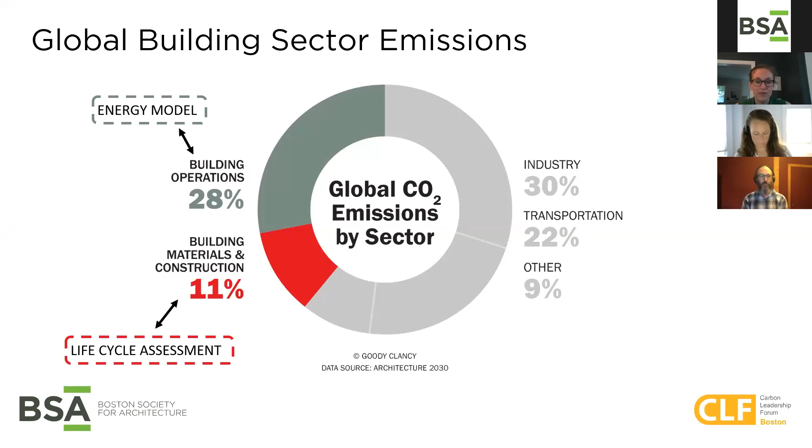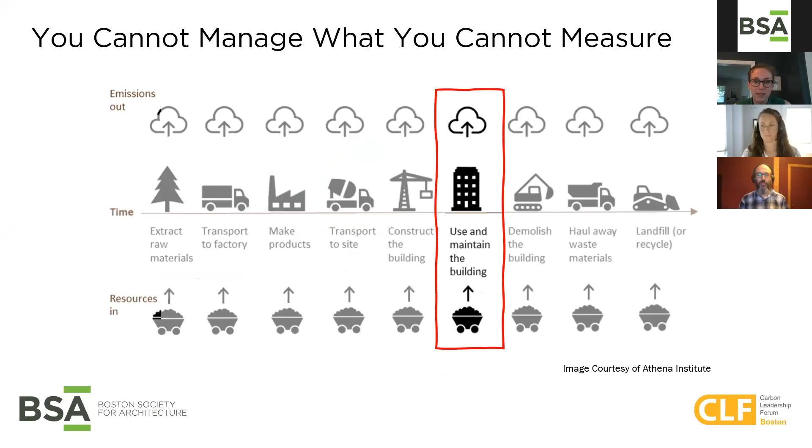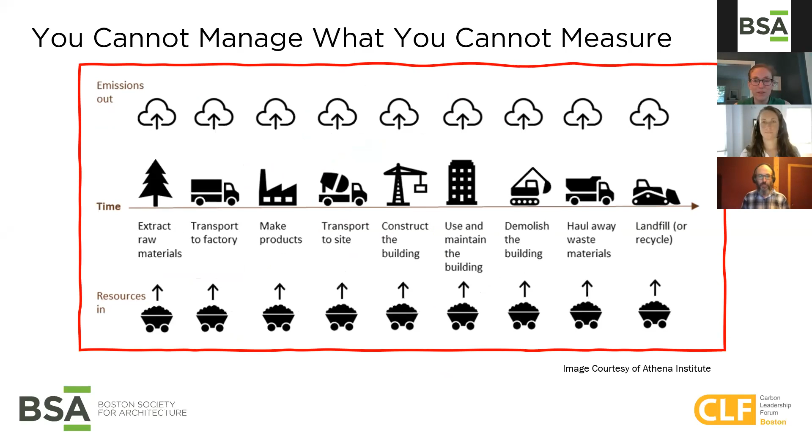I just want to reiterate that you can't manage what you can't measure, and I think we've heard this need to quantify throughout the series. Previously, when we're only talking about energy modeling and quantifying operational emissions, we're just focused on this one little narrow piece of a building's life cycle. But it's really important that as we work towards these carbon mitigation goals throughout the world, we're looking at the whole picture. We need to understand where carbon emissions are coming from throughout a building's entire life cycle and when those emissions are occurring.

But luckily, it's a fairly simple equation when you really get to the basics of life cycle assessment. You really just have to know how much of a material you have, and then you multiply that quantity times an impact multiplier, which the data is something we'll talk about, and then you get an environmental impact.

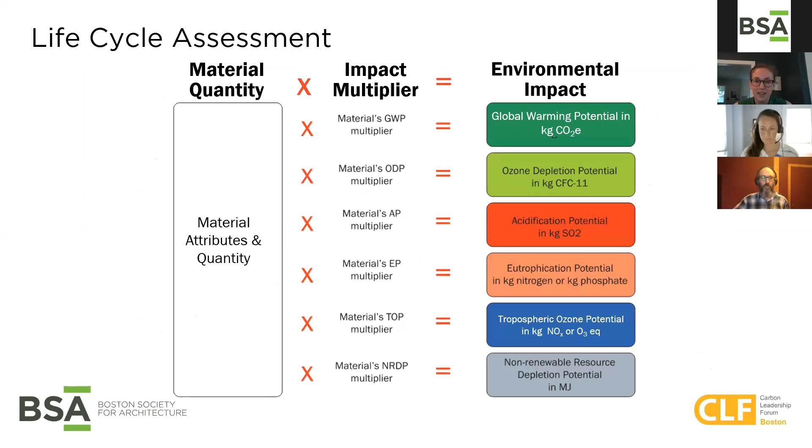These are just a sampling of questions that I came up with. There are obviously many more, which Maggie and Jacob will get into. So with that, I will turn it over to Maggie.

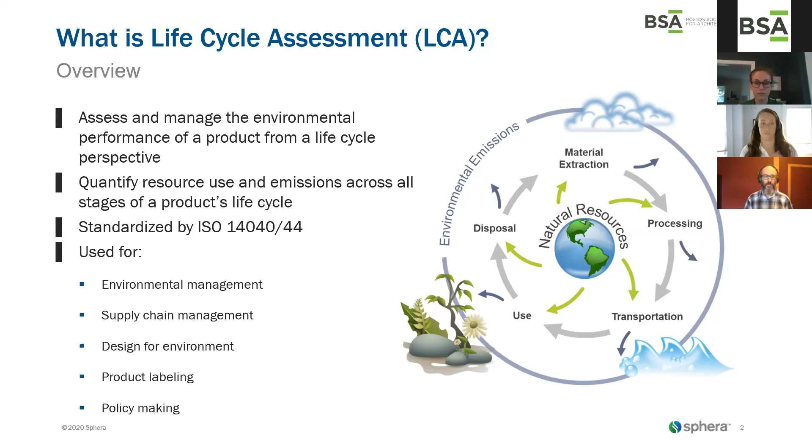So the ISO standard has four parts within the framework of conducting an LCA. The important thing in this image is the double-ended arrows - it's an iterative process. You may discover things as you're doing an LCA that require you to refine your goal and scope, to look for data elsewhere. You may want to include or exclude something later on, depending on the uncertainty associated with it. So there's always the opportunity to go back and refine.

So the first step in doing any LCA is to define the goal. Why are you conducting the LCA? What do you hope to get out of it? That'll inform how you set your system boundaries. Then you determine the scope, so what is included, what isn't included, details like the functional unit, where you're going to get data from, what impact assessment categories you're going to look at, etc.

Once you define that, then you're going to do the data collection, and this is looking at just the primary data. So if you're an insulation manufacturer, you're going to look at all the inputs and outputs associated with your facility. Then the modeling process combines that with background data, and that is life cycle inventory data, existing EPDs, etc., that you combine to create a complete inventory.

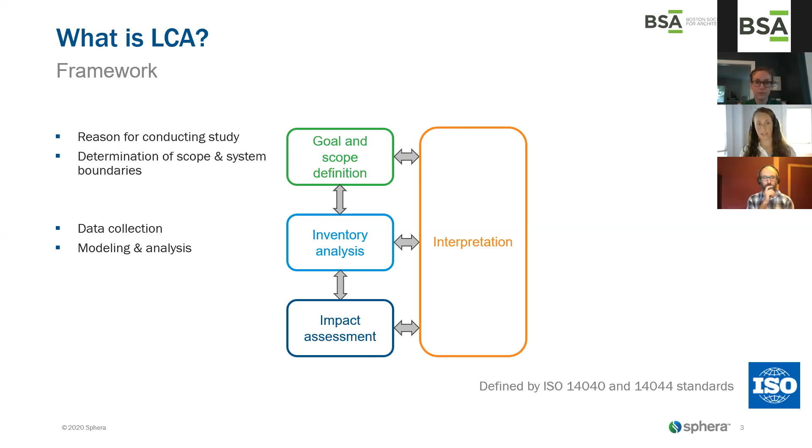That inventory gets looked at through the lens of impact assessment. So inventory is the amount of carbon dioxide, the amount of methane, and impact is global warming potential. So those each have their own contribution to overall global warming potential.

And then you have to interpret it. You have to understand where did you make assumptions along the way? Are your results sensitive to those assumptions? Do you need to consider the uncertainty around your results, because the amount of electricity used during the use phase of the product could be plus or minus 30%. So you need to consider how that affects the overall results.

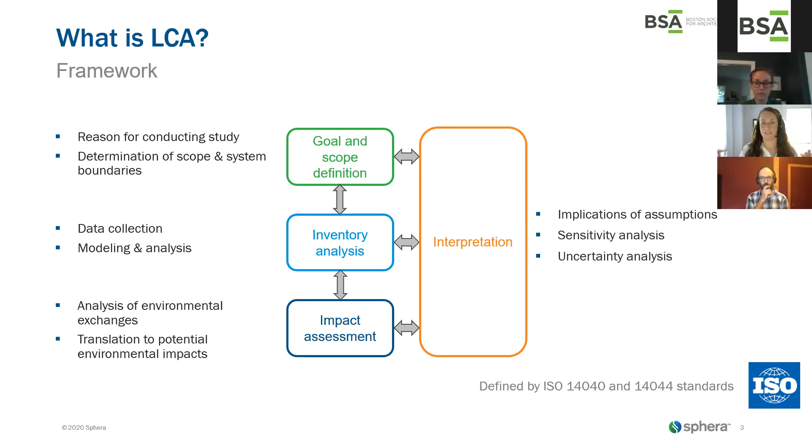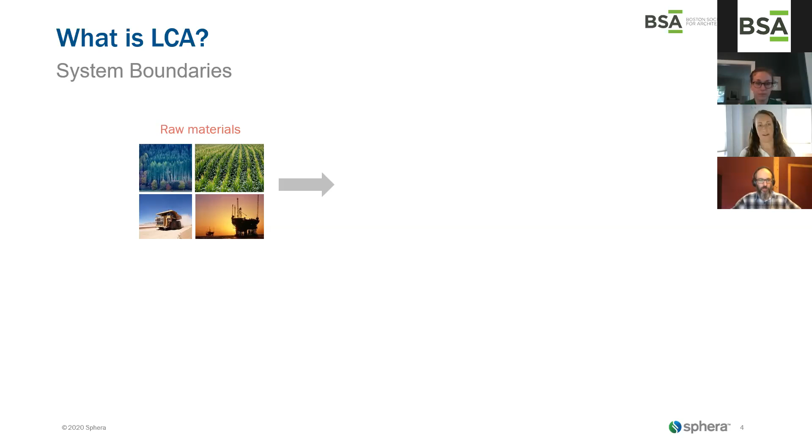So when we talk about system boundaries, you've probably heard the term cradle to grave, cradle to gate. This is what we're talking about. So you start with raw materials. That's anything coming from the ground. That's crude oil, wood, water, etc.

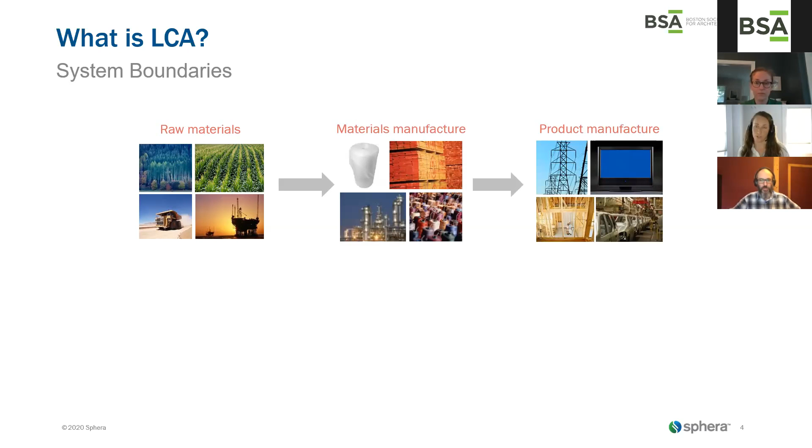There's materials manufacturing. So you've extracted ore from the ground that gets processed to zinc. And then you use that in your product manufacture, so that's creating the final product before it goes to the consumer. That's what we call cradle to gate. That is the system boundary that's really in the control of the manufacturer. They can kind of choose roughly what materials they use and where those come from, as well as everything that's going on at the actual facility.

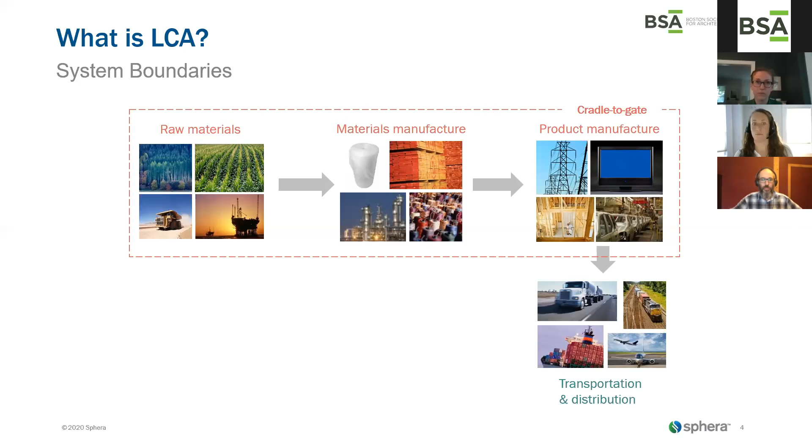Once you add in after the facility, so transportation and distribution, which you could argue is somewhat under the control of the manufacturer, but depends on who's purchasing the product. The use phase, recycling, so does any of the product get recovered and then could somehow offset any of the inputs to materials manufacturing? And then final disposal, so landfilling or incineration. Once you add all these categories in, we've got cradle to grave.

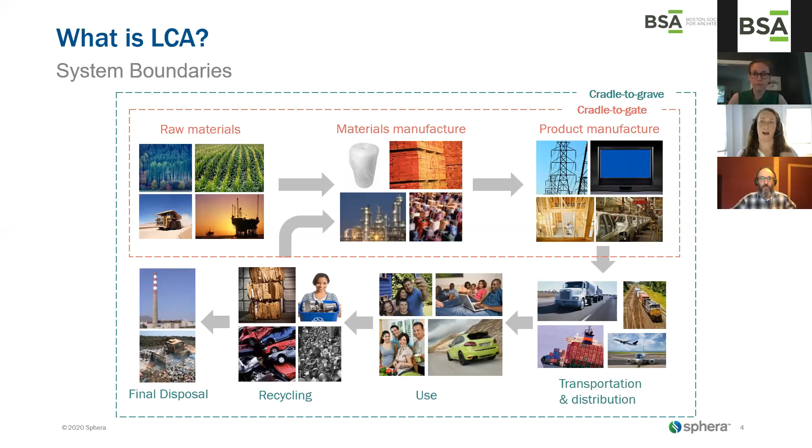Another way to think about it is the modules that you'll see in environmental product declarations. So pretty commonly you'll hear the term A1 to A3, which is the production stage. That's basically cradle to gate, the bare minimum required in any EPD. Construction stage is A4 and A5, so that includes transport to the installation site, and then any burden associated with installation.

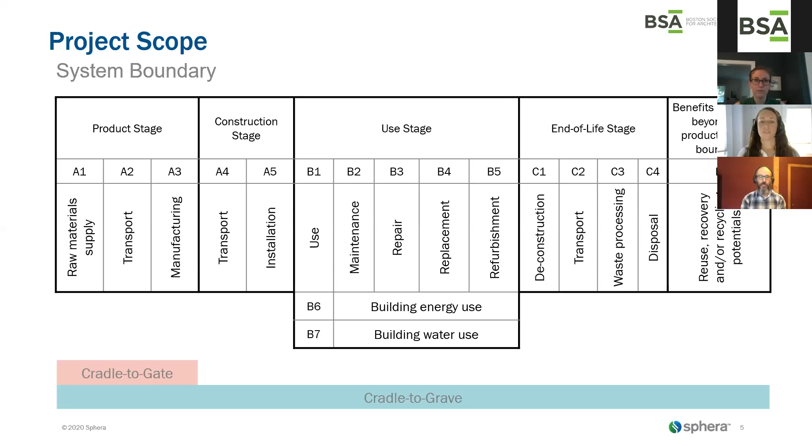Use stage is the B modules, end of life stage is the C modules, and module D is any recovery outside the system boundaries. So you don't necessarily know that in 60 years the steel in your building will be recycled. It probably will, but we want to account for that. Once you add in all the modules, then you've got a cradle to grave system boundary.

So I've said life cycle inventory a couple times. There's also, and I realize maybe I haven't defined that, two terms: life cycle inventory and life cycle impact assessment. Life cycle inventory refers to kind of two areas. It's the amount of materials or energy required to make your product, so in this case the amount of electricity, fuel oil, the emissions associated with it.

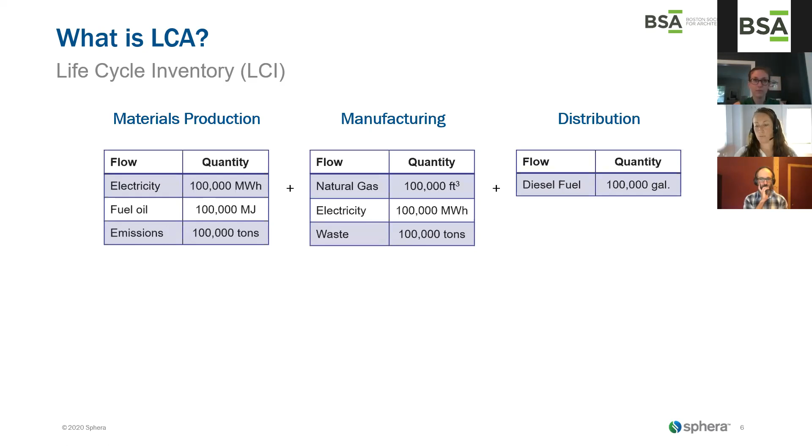So this is like upstream materials production. There's also that same information available for your manufacturing and the amount of fuel to distribute the product. So this is your life cycle inventory process. You might also hear of it as a unit process, so it's all the inputs and outputs associated with making a kilogram of a product.

When you combine that with background data, so existing life cycle inventory data, the amount of emissions or resources required to produce a kilowatt hour of electricity, that is when you get the full life cycle inventory, which is the list of resources - crude oil, hard coal, groundwater coming out of the ground before man has touched it in any way, or woman - and emissions to the environment, so air, water, land, etc., after humanity has released it back into the environment or the watershed or what have you.

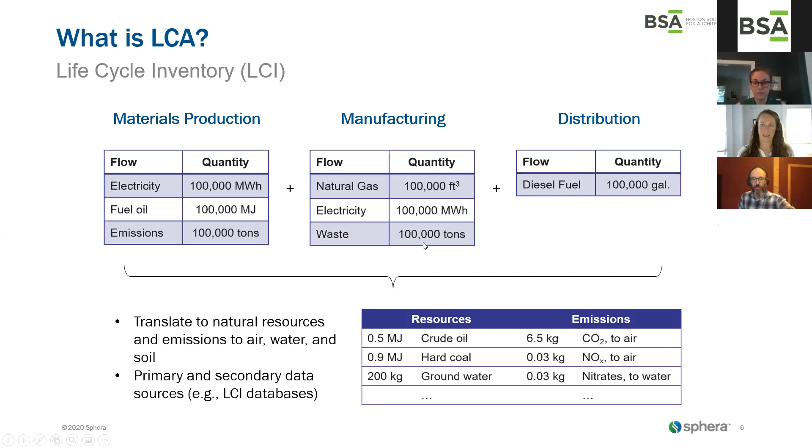So you end up with this long list of emissions that I don't know if a kilogram of CO2 compared to a kilogram of NOx is good, bad, medium, can they even be compared? So what we do is we translate to a life cycle impact assessment.

Different emissions to air, water, or land have different abilities to affect the environment in some way. So methane and carbon dioxide have the ability to increase radiative forcing associated with greenhouse gas effect. We then assign equivalencies, so the kilograms of CO2 equivalent, to basically be able to talk about methane and carbon dioxide in the same units.

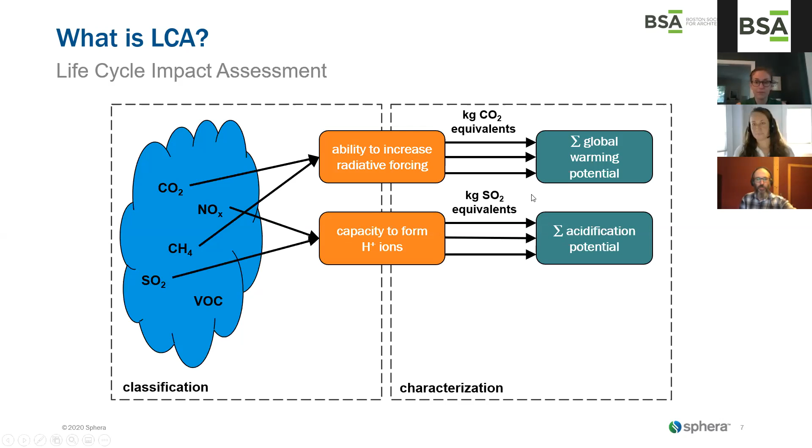And this is also done for acidification potential. So NOx and SOx have the ability to form H+ ions, making the air more acidic and therefore rain more acidic. And then NOx and VOCs have the ability to form tropospheric ozone, which is summer smog potential. So these are your life cycle inventory here on the left, and on the right you have your life cycle impact assessments, and that is done so that we can come up with common metrics to discuss environmental impacts.

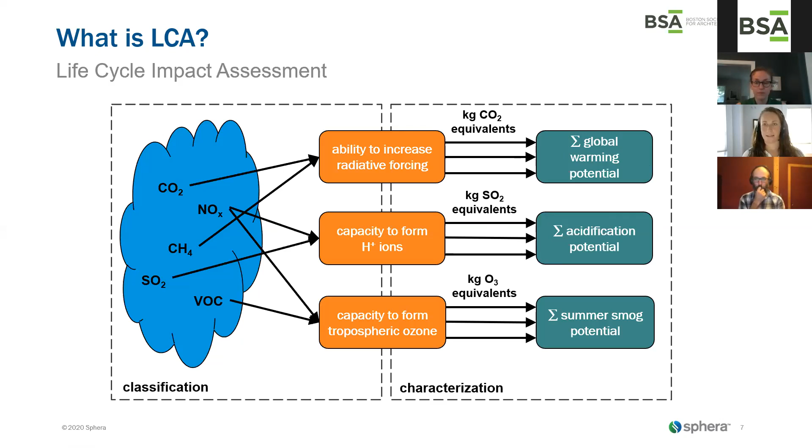So just another example: we have the inventory value, the amount of methane, the amount of carbon dioxide, and then we have the characterization factor. Lori talked about this in her slides at the very beginning. Methane clearly has a lot higher impact on the environment, so in this case, even though we have way more CO2, the impact of the methane is actually higher on the global warming potential.

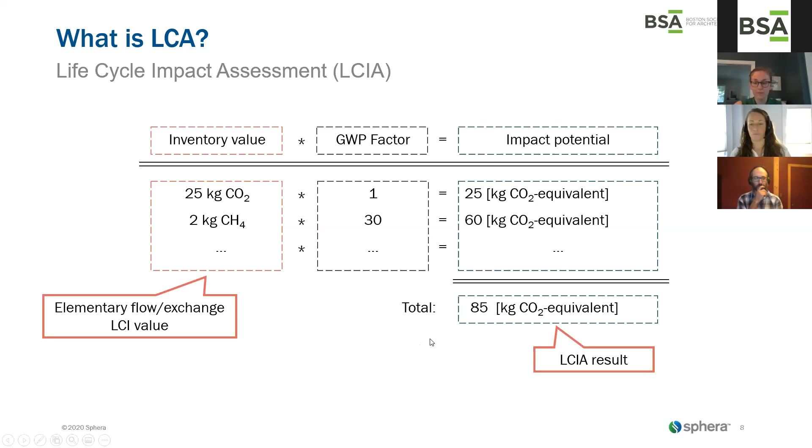So this is how we calculate the life cycle impacts. There's a number of life cycle impacts. I know we're talking about carbon here, but it's important to remember that for every decrease or increase in carbon, there are trade-offs in other environmental indicators. Obviously you can't expect everybody to be able to weigh all these different impact categories themselves without a lot of experience, so I think it's great that we're starting with carbon, but it's important to remember there's other things besides carbon.

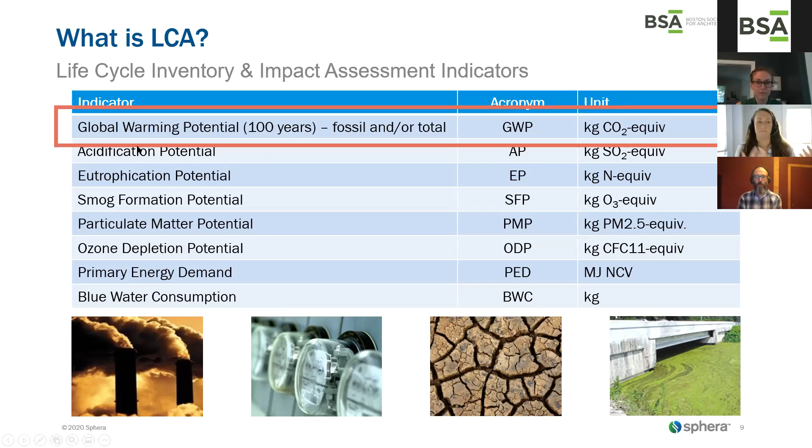Examples include acid rain, smog, ozone depletion, particulate formation, etc. So you can go into this on your own — I'm not going to get into too much detail.

The other tricky part about LCA is interpretation — how do you use the results, what do they mean? What we have here is a basic contribution analysis. You'll notice we're not focusing on the number, we're focusing on what is driving it, what is bigger, how do we get that lower, where are opportunities as a manufacturer to reduce my impacts.

So this is one way that LCA is so great, because it's really used for optimization. It tells me where's the low-hanging fruit, where do I focus on in reducing my impacts. Alternatively, I may have no control over the active use, so while I acknowledge it has a big contribution, I can't change that, so let me focus in on manufacturing.

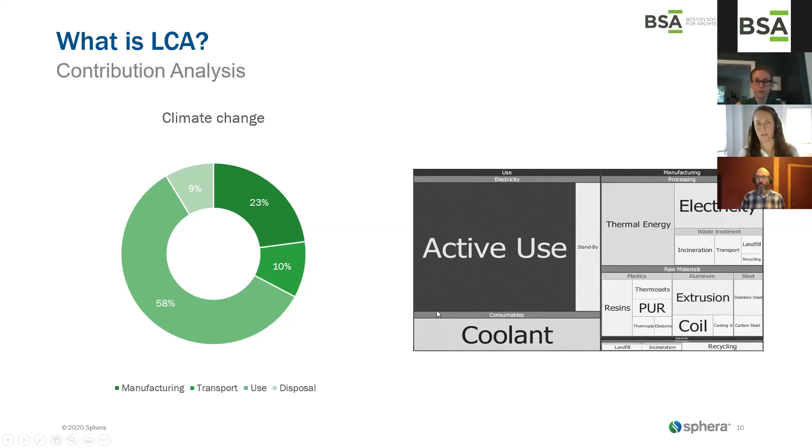I do want to do a couple disclaimers. One thing with LCA is its potential environmental impacts — we always say global warming potential, acidification potential. We have no ability to predict absolutely that a kilogram of CO2 released now is going to actually have this global warming effect.

Also, there's inherent uncertainty in LCA. You're combining data — your manufacturer is trying to represent production for 2020, but you're creating an LCA with background data that's actually from probably 2015 through 2018. And then you're going to use that in your EPD, which is valid for the next 5 years. So if you think about that, there's a huge temporal uncertainty associated with it. It's probably not going to change dramatically, but it's important to note that there is that difference.

You're also using average geographical data — I have an average data set for electricity produced in the US, or average mining of some metal, but you're getting it from this specific location. In fact, it's not going to give you the precise results, but it'll give you accurate results. So I just wanted to put that disclaimer. It's not that you shouldn't use LCA — the results are still valuable, but to three significant digits it's maybe not that helpful; order of magnitude is really where you should focus.

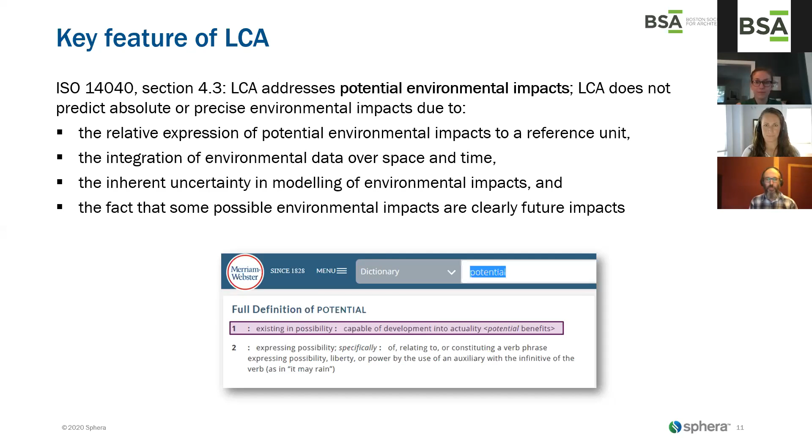We love using this picture. It's never going to be perfect — we know that — but it's going to get you somewhere, and it's going to get you to understanding if something is roughly better, roughly worse, roughly the same, and also where you can improve.

I also wanted to touch briefly on biogenic carbon in LCA. The Carbon Leadership Forum did a great large session on just carbon and wood, so you could spend weeks talking about this. I don't want to get into too much detail, but basically people have this initial thought: okay, it's renewable, it's wood, it's absorbing carbon, therefore it's carbon neutral or carbon negative.

But in fact, during processing, manufacturing, maybe even use and disposal, that CO2 may be re-released. So we have CO2 absorbed when the product is growing, but then you could burn wood for fuel in processing, and you release carbon dioxide. You may also incinerate it at end of life, and then you release that carbon. So it's not necessarily neutral or negative — it just depends on what happens over the life cycle.

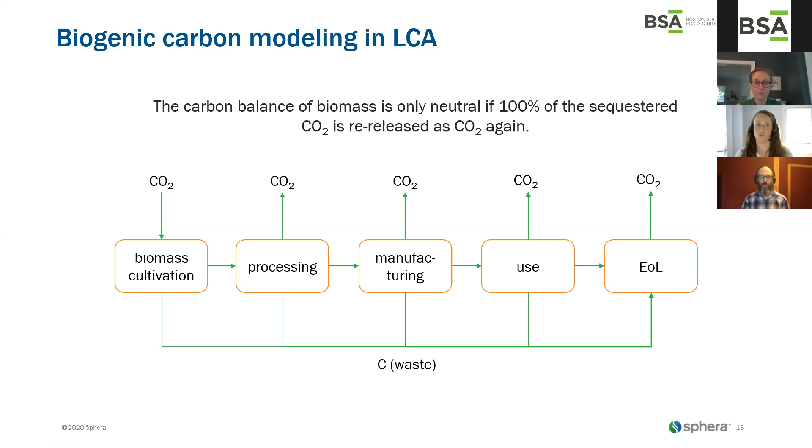So it's really important to account for that when you're modeling. The other thing to note is that if any of the CO2 or carbon is converted to methane, that's actually going to have a higher impact than what was withdrawn from the atmosphere when it was growing. So it could actually end up not being carbon negative or carbon neutral. If you really want to dig into this, I put the link for the Carbon Leadership Forum's Wood Carbon seminars — you can get into a lot of detail, but I just wanted to touch on that briefly.

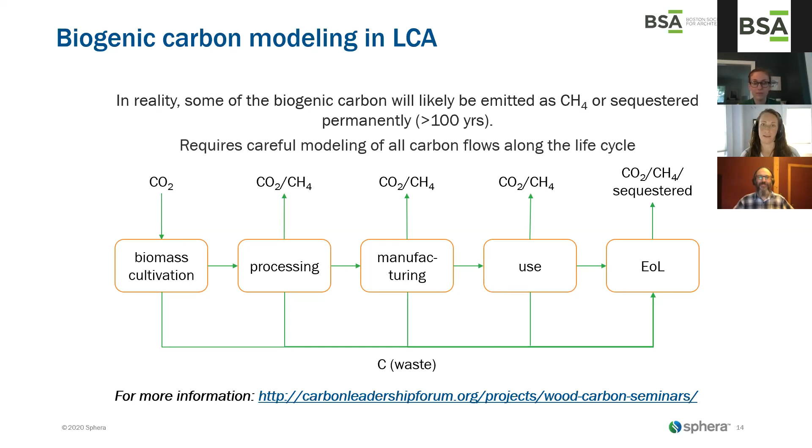Another thing to note is that your EPD, your LCA data, is only going to be as good as the data underlying it. So we have two areas of data, primary data and secondary data. Primary data is your bills of materials, details on technology, recycled content, etc., where it's coming from. That's coming from the manufacturer, and so they need to provide complete data. Part of that is on LCA practitioners like us at Sphera, who have to make sure they've provided complete data.

The secondary data is background data: the energy, the impacts associated with producing a kilowatt hour of electricity, environmental product declarations, literature. These are the sources of data that go into another LCA. And the goal is to have those come from reputable sources.

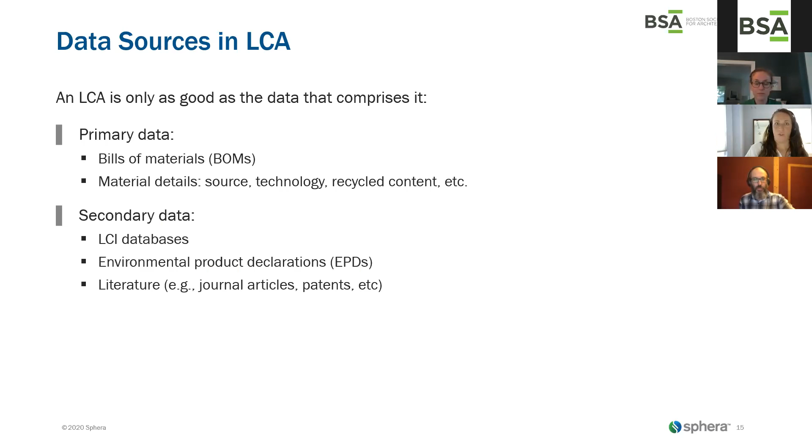Anybody could publish an LCA on their website, and it may not be complete or of high quality. ISO specifies details on data quality, and you need to discuss those in your report.

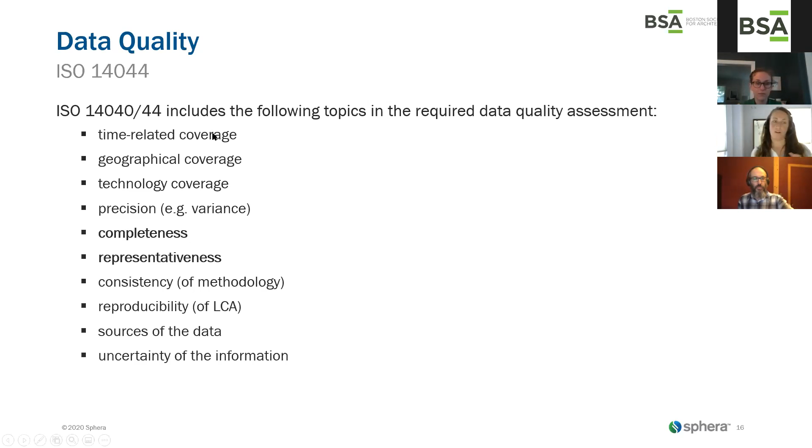A few things I really want to dig into are completeness and representativeness. When you're considering representativeness, you're modeling for a specific location, a specific technology, at a specific time. So you want to get as close as possible to that, but you're never going to hit it right on.

So it's important to be as representative as possible, but know that you're never going to be precise. And completeness means making sure you're using a reputable source for your background data, as well as for conducting the LCA, because a lot of completeness comes from just experience doing LCAs.

You may also want to dig into the available documentation. What are the assumptions behind the LCA? What year is the data from? Did they exclude anything that might actually be important? Stuff like that.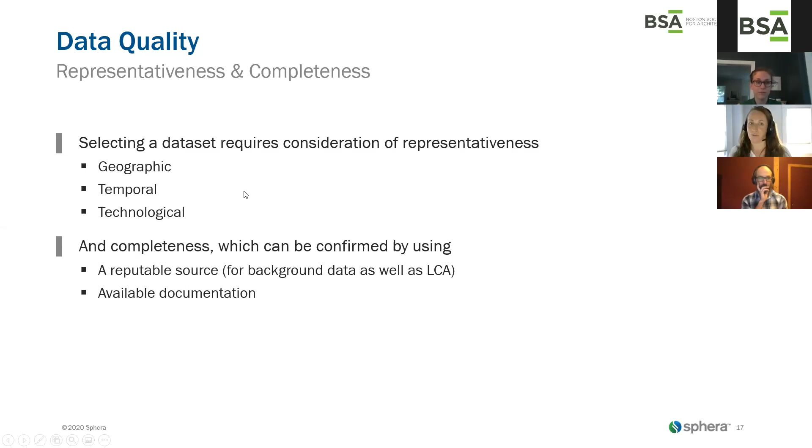This matters when you're talking about data quality, especially when trying to choose an appropriate data set. So for anybody using Tally, you've got an average data set and a company-specific data set or EPD. How do you choose?

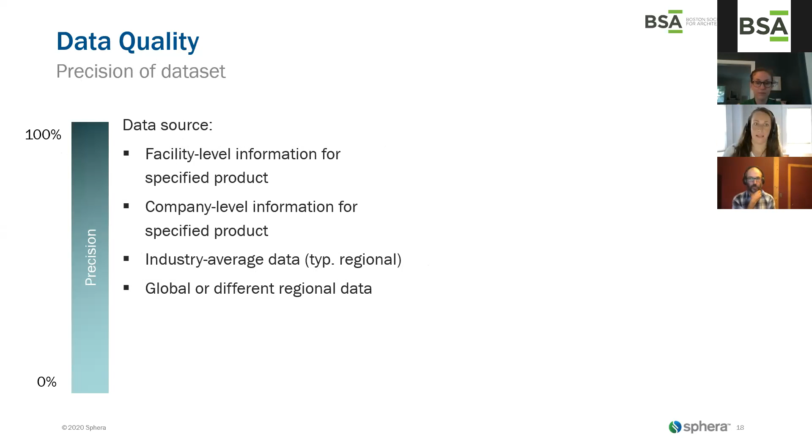I want to emphasize that in LCA in general, we're really looking for high accuracy but low precision. We understand that you're never going to be precise for the reasons I've already mentioned. So trying to get order of magnitude is the real goal.

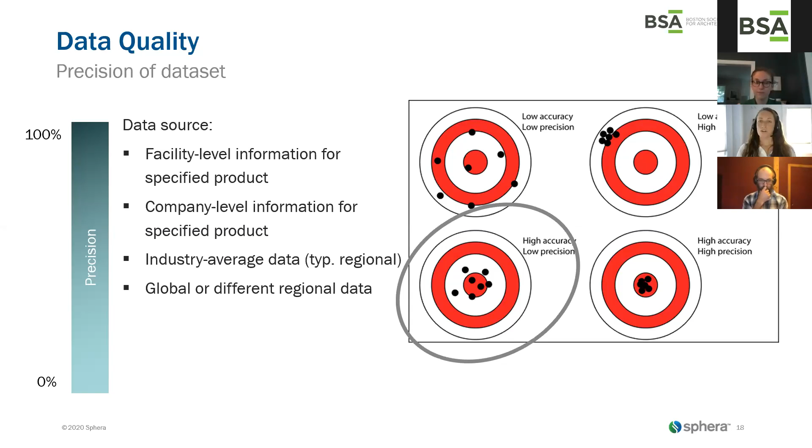You may be fine just choosing an industry average data set because it's going to help you make that initial decision—do I use material A or material B? As you improve the selection of materials and know what company you're getting it from, then you can increase your precision.

For example, I just pulled these from the internet, publicly available EPDs. If you were making a decision between mineral wool and fiberglass, it doesn't really matter which one you choose between industry average, which is the NAIMA, and the company specific, which is Owens Corning or Certainteed. You're still going to get a pretty clear answer which one is better for your project.

LCA and carbon footprint are only one of many metrics you'd use to make a decision between materials. So it's not necessarily the only one, but if you've decided as a specifier or designer that the most important factor is global warming potential, then you might look at this and say, well, we want to go with fiberglass.

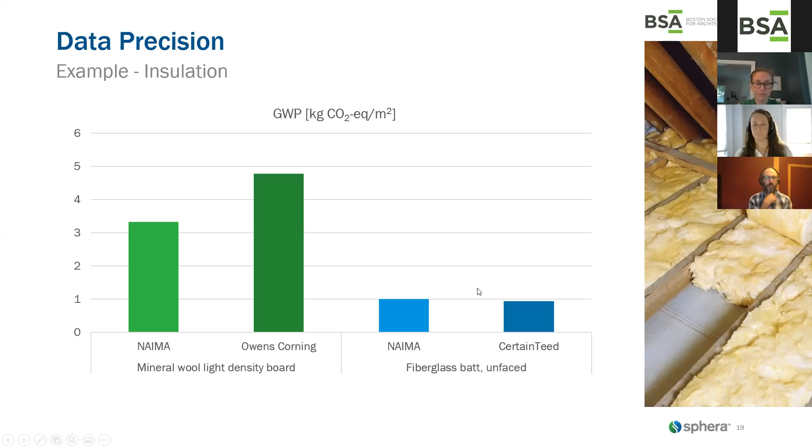I know there's a lot of caution against comparing LCA results and EPDs, but ultimately that's what EPDs are created for—to give consumers an idea of the environmental impacts and how to make a decision between product A and product B.

So while I do advise caution whenever comparing results, if you are, please make sure that, if it's an EPD, the product category rules are the same. That ensures that any underlying methodological decisions probably will align.

You certainly need to make sure the functional unit is the same. Is it 1 meter squared of product at an R value of 1, or 1 meter squared at an R value of 10 or something? That's obviously going to make a difference.

System boundary—have they included or excluded the same things? And in those things included or excluded, could that actually have a big impact? Reference service life—are the products actually equivalent, functionally equivalent? Can you use them for the same amount of time in a building? If not, if you have to replace one product twice, you should take that into account.

Reference year of the primary data—ideally they would have the same reference year or as close to it as possible. Background data ideally would be the same, and the reference years would be pretty close.

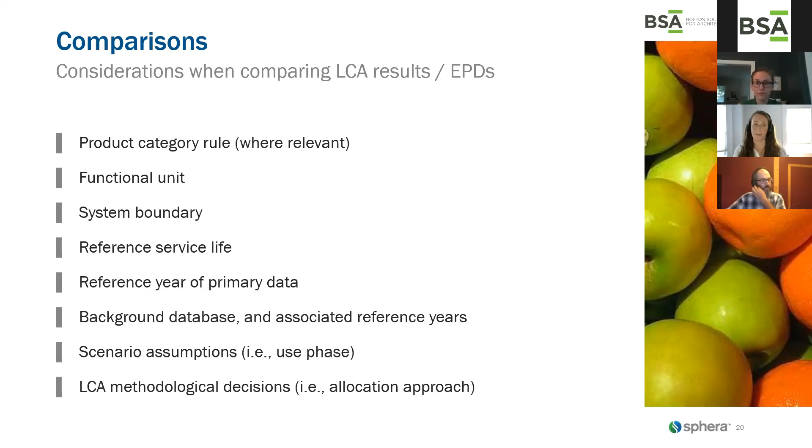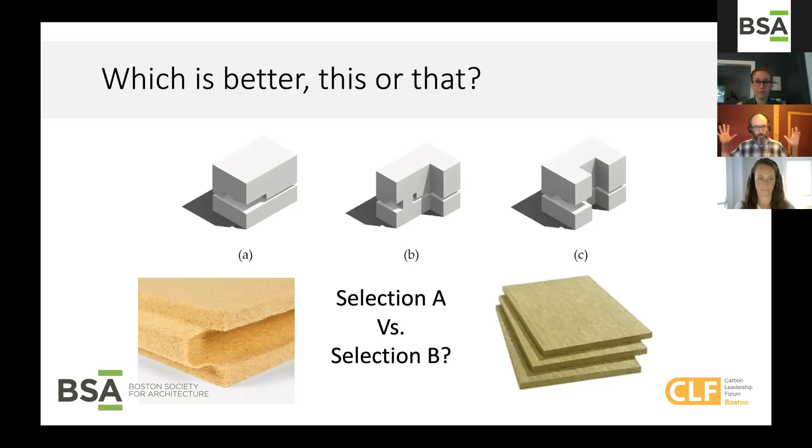That same question of this versus that may show up on a very detailed material basis. That's where it's asking, is this wood fiber board or this mineral board going to be better from a carbon standpoint, or by what magnitude? So that direct comparison, whether it's big picture or micro, is one batch of questions you might be asking.

Another would be, how much better is this, and then compared to what? And that introduces a concept of baselining. If your goal is to improve your design, compared to what is that baseline? That could be my massing scheme compared to a baseline of your generic clip art building, or my sexy new carbon storing building insulation product compared to the average practice of, say, a foam board product. So how you establish that baseline, what that baseline is, and how you define improvement relative to that baseline all become additional points of relevance in the analysis.

You can have some really poor analysis and come to some poor conclusions if that baseline has not really been clearly and well established, and it isn't transparent to understand what that's comparing to. You can kind of game that system and come up with some misleading conclusions if that's not attended to. So that's just another batch of questions and series of variables to consider.

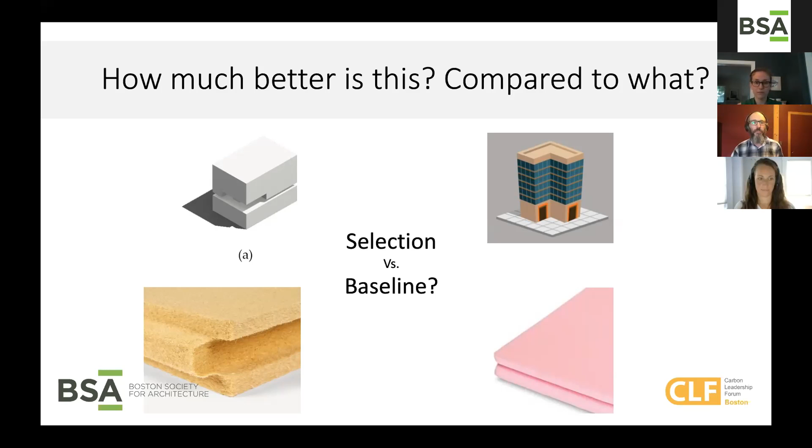If you're looking at a more quantified approach, like how much carbon is this product emitting, or even more complicated, is this building emitting, that quantification has some more variables that need to be brought into the equation. Maggie did a great job of really exposing a lot of these variables from the LCA process. The key questions would be, what are we including in the scope? Are we counting all the interiors? Are we counting changes over time within the normal expected lifespan of this type of building? MEP, mechanicals, electrical, and plumbing, huge levels of impact that are frequently not included in a lot of assessments, especially if they're just looking at building shell or structure. That can be a pretty significant number.

And then how micro are you getting? You're looking at all the fasteners and adhesives and the membranes, so that's more about how much you're counting within the building. And then there's that scope of, beyond the building itself, what might be considered. Again, looking at that LCA structure, there's different modules that will show you where within the lifespan of the product, but also within the building, emissions are occurring.

I'm using the word material carbon storage here with acknowledgement, as Maggie was discussing, that at the end of life of a bio-based material, that carbon is not expected to be permanently bound in that building, because our buildings aren't permanent. Whereas sequestration, in my understanding, is more of a longer term binding of that carbon, I tend to use the word storage when I'm looking at it in a building context, acknowledging that it could be reversible and could be re-aerosolized, or that carbon could combine with hydrogens to create methane or what have you.

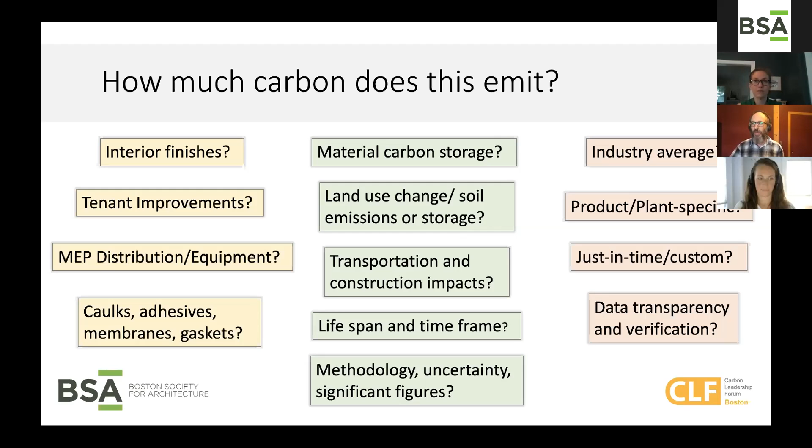And then if you're going for a program certification, and part of your goal of accounting for carbon is to comply with the program or get a certification, you're going to need to check those program requirements. So, a couple examples: the ILFI zero carbon certification has its own prescribed tools that it accepts and its own process around counting embodied carbon.

Dummer is a township in Ontario that now requires a declaration of the embodied carbon for residential new construction, and it needs to be below a set limit, which is pretty impressive.

They couple that with a carrot of an incentive for builders that meet that limit, and they require use of a tool that Builders for Climate Action has developed specifically for that compliance. We'll take a peek under the hood of that tool in a little bit.

Just a little plug for Mass CEC, since this is kind of a hometown crowd here. They just announced a triple-decker retrofit design competition.

So retrofitting for 3-story multi-unit buildings, and one of their criteria for that competition is the embodied carbon. A modified version of that BCA carbon accounting tool is what's being used for compliance there. So if that's your goal, you'll want to know what the rules are and use those tools accordingly.

Another really big question here is: who's the audience? So the analysis... oh, lost my mic. Pardon me. So the analysis is only as useful as it is actionable.

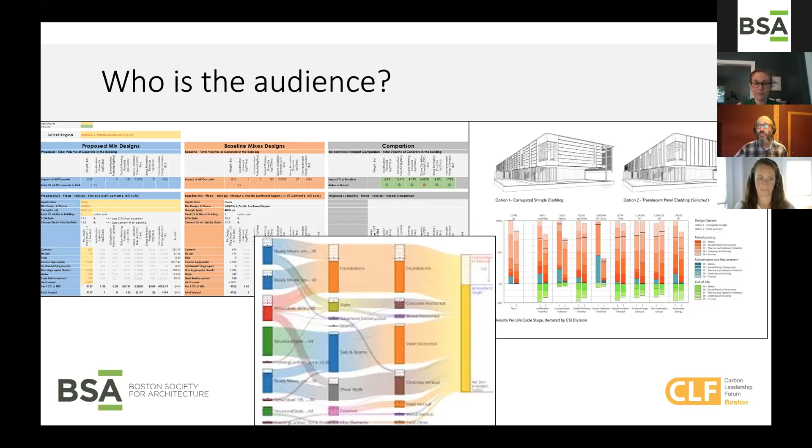So seeing again here a host of different tool solutions. We'll go through a few of these. We're really not going to spend too much time getting deep into any of them, just enough to paint a palette of what's out there and the different types of tools.

At this point, it should be clear these are LCA tools. Maggie got into some pretty good depth around what LCA means and what's included in there. Tally's the one our company uses, that's why I keep referencing their graphics, because that's the tool we happen to use in-house.

It works off of the Revit platform, so if you use Revit for design, Tally's a great option. One-click LCA is a close competitor, has a lot of very similar features, but is not coupled to a specific design program. And Athena Impact Estimator is a free program where you sort of do your data inputs differently than if it's synced right into your design software.

So those are all LCA tools. There are also some specific carbon accounting tools. Again, like Maggie was saying, carbon is not the only thing being assessed through the LCA process. If you're really looking specifically at embodied carbon, there are a handful of tools dedicated directly to that. We'll look at EC3 and the Builders Climate Action tool I mentioned. There are also a few specialty tools we'll look at that are designed for very particular points of reference.

Those tools are not to be confused with the data sources and databases. EPDs are one great source of data. We're not going to talk a lot about using the raw data or going to EPDs or databases like Circular Ecology's Inventory of Carbon and Energy database, which have been developed for people to reference and use and do some of their own custom calculations. There is a whole process there. Maggie referenced a bunch of the different caveats and points of consideration for making that data comparable.

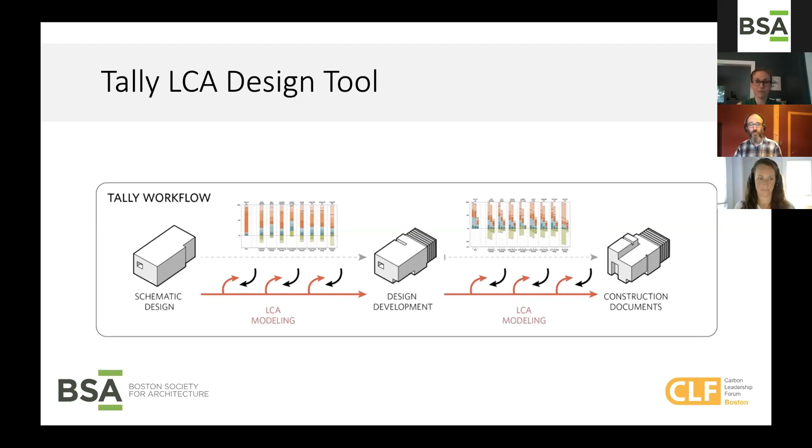Once you get into design development and you've got a lot more definition around the materials in that assembly, or comparing different assembly types or different finishing materials, or what your interiors palette might look like, at that point your analysis and tool usage will be a little bit heavier. You've got more to look at, more bits and pieces. You can see just by the bar graphs here there's a lot more little pieces in there, and that's where there's maybe a bit of a heavier lift and more roll-up-the-sleeves work in that analysis, as you've got more detail to inform those decisions. And then it'll take you on to construction documents.

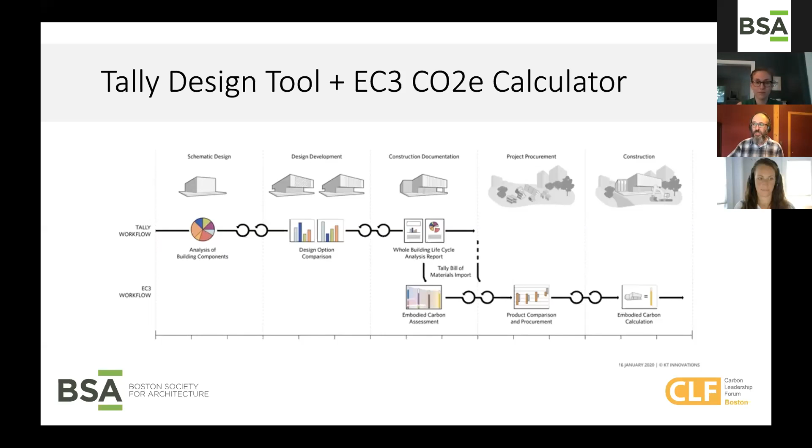That gives a good sense of how, in our practice, we've been using both of these tools to understand the climate impact of our design, not just moving through the design process, but as we get into construction, as the design-build firm, we've been able to use that to get a better understanding of that impact all the way through.

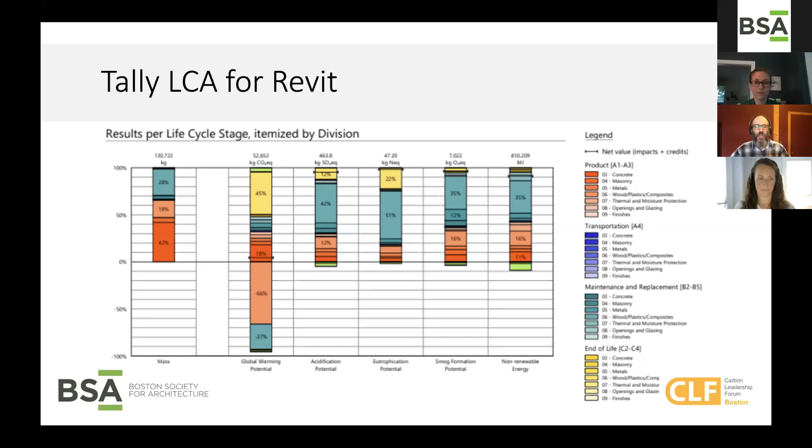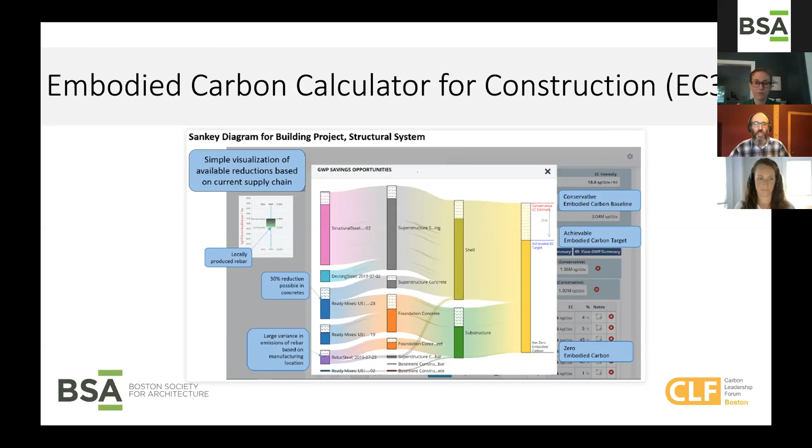The detail that goes into that picture is also another really great thing about EC3 — it looks at that EPD-level information, comparing a whole bunch of different product declarations from a whole lot of different products and different divisions. You get some pretty direct, immediate product comparisons.

And within that, the tool is able to establish a baseline. So if you're doing baseline analysis and your targets are around a reduction from baseline, this is a tool that gives you that pretty visually and pretty quickly. Of all the EPDs for that material in the tool, it tells you what that baseline is and what a reasonable target is that you should be able to achieve based on your procurement specifications. So that can be handy that way.

And then of course, the transparency of that data is a huge part of it, and you can look up the individual EPDs for those products.

You can get a sense that you can filter it by your location to dial in the accuracy, and what plants you may be sourcing your material from, et cetera. So different information, different granularity for answering different questions at different parts in the process. Those two tools have been designed to be used together to bring you all the way through the process. Again, those are by no means the only two tools, just one example of how you can use a couple of tools together to complete that workflow.

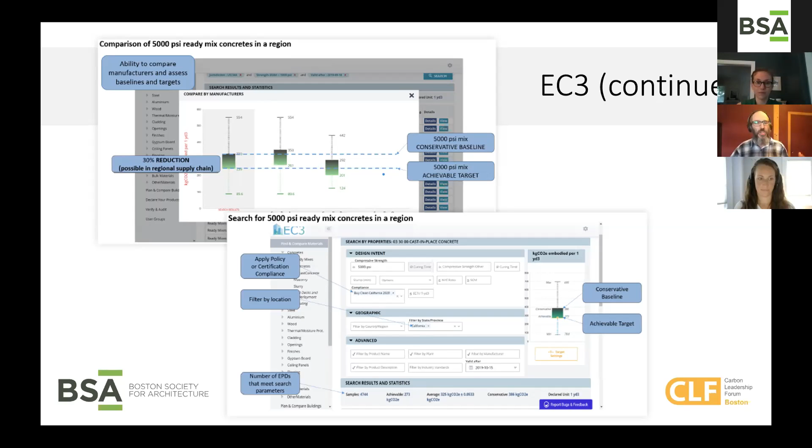Another way of looking at EPD level analysis specifically for embodied carbon is this tool that Builders for Climate Action has developed. Chris Magwood, who is director of the Endeavor Center, has put a tremendous amount of work into creating this tool, and then we've been working together to bring it to a couple of different applications.

The idea was to make it a much easier point of entry for those that are not in an architectural practice, but are involved in design decisions, or for builders that are not heavily involved in the design process but want to understand the impact of their decisions. For folks that aren't working on a BIM design platform, and just want an easier way of plugging in information and getting data back.

This is a simple spreadsheet-based tool that will have a web version, where the inputs are very similar to a UA calculation. If you've done basic energy modeling, basic building dimensions get plugged in. We'll take a look at the different levels of output, but plugging in for your different types of assembly - interior walls, exterior walls, floors, ceilings, etc. Then you get a total carbon output - this is embodied carbon dioxide equivalent output, as well as carbon intensity, so kilograms of CO2e per foot squared.

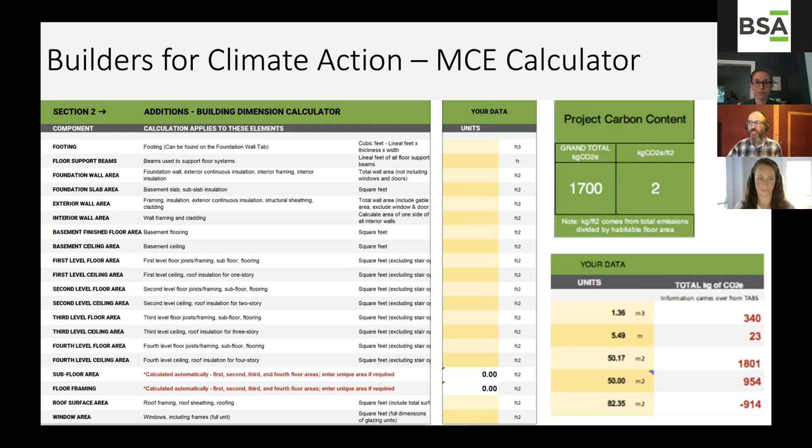And this is just looking at A1 to A3, so cradle to gate, with a few items that are in A5 when the materials are being installed.

So once you get into the tool, all these quantities you've already filled out, and then you can just check and select which parts of the assembly you want to choose for consideration. But what's great is you can see revealed, for all the different pre-populated framing types, insulation types, etc., what the values are for that given quantity of material and for the R value specified if it's an insulation material, and then be able to choose accordingly.

There's also a percentage factor there - so if you're using a combination of two different insulations to get your total R value, you would just check multiple boxes and enter your percentages accordingly.

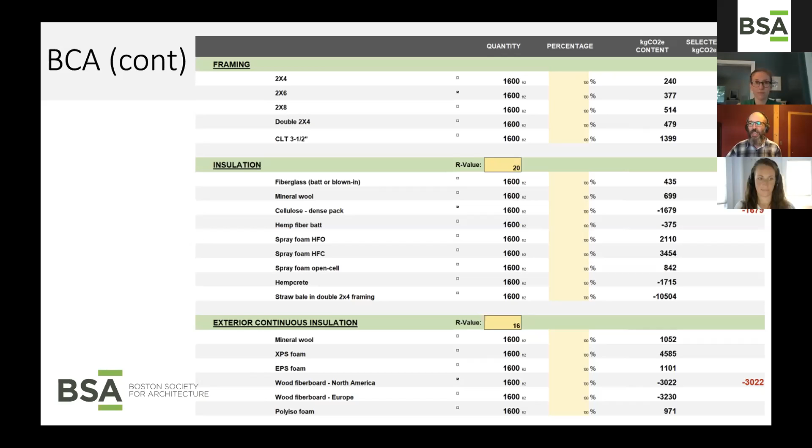So this is more of a quick lightweight way of getting both comparative analysis across these different materials, but also a quantified analysis within the scope boundaries of cradle to gate embodied carbon sourced from EPDs.

And then again, there's a few of these to kind of wrap up here - there's a couple of these specialty calculators that are out there. This is just a very, very small selection of a host of tools that are out there in the world, and more coming online every day.

But just to give a sense of the diversity of tools that are out there, Thornton Tomasetti has recently released Beacon, which is an embodied carbon tool specifically for structural engineering. That's designed for PEs to be able to get feedback specific to the scopes of the building and the processes in which they work.

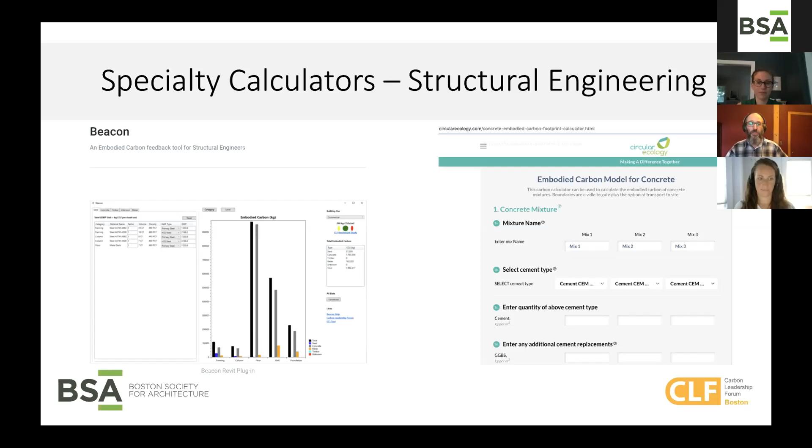There's a bunch of different tools out there specifically looking at concrete. Circular Ecology, the same folks that now host that Inventory of Carbon and Energy, also have an embodied carbon model for concrete. Climate Earth is another great resource for carbon accounting in the concrete world, and they've got a bunch of free tools on their site as well, so you should also check them out.

And then on the biogenic side - again, that's a super slippery one, as Maggie referenced, and I would also second: definitely go check out Carbon Leadership Forum's series on wood just to get a sense of the complexity of biogenic carbon. In our practice, we use a lot of straw and other agricultural residue materials, which involve a whole different series of variables than wood. So the world of biogenic carbon is actually quite complex and diverse, and beyond just wood.

So just looking at a couple of tools to assess that, WoodWorks, which is the Wood Products Council, has developed a tool that looks very specifically at the amount of carbon stored in the wood in the building, based on your dimensions, specified species, forest sources, and timber types, and translates that into greenhouse gas emission equivalency. So that's just looking very specifically at that calculation.

This Build Carbon Neutral tool gives a very basic assessment of the impact of a building, but also broadens the scope greatly to look at change in land use, as well as soil carbon emission impacts. So that's another different scope and set of data to be looking at. And again, there are a dozen other tools out there for different points of reference in your analysis, depending on the questions you're looking to answer.

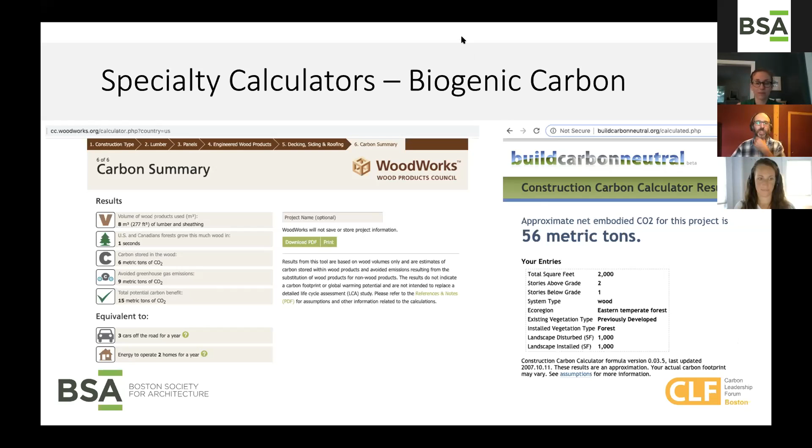All right, thanks Maggie and Jacob, that was great. We've got a few questions live here. I think we have time for a question for Maggie: how are the geographic, temporal, and technological differences in LCIs accounted for in an industry-wide generic type 3 EPD?

So the goal with any industry average EPD is to be as representative as possible. So we try to get a good fraction of the production volume, and if we can't, if there's a lot of small manufacturers, we try to get a cross-section that represents the geographical representativeness. If there's multiple technologies, same thing, we want the right mix, but obviously if there's two different technologies associated with making that product, you're only going to end up choosing one when you get the company specific version. So there's maybe a little bit more uncertainty associated with it, but it should give you order of magnitude.

And generally, if there's going to be dramatic differences in the technology types, we would probably suggest separating those results. So the attempt is to be as representative as possible, but certainly there's more variation within an industry average than company specific.

All right, let's do one more. Can we recommend any embodied carbon databases for buildings? We've been referencing the databases by the Carbon Leadership Forum as well as RICS in the UK. Are there others that you're aware of?